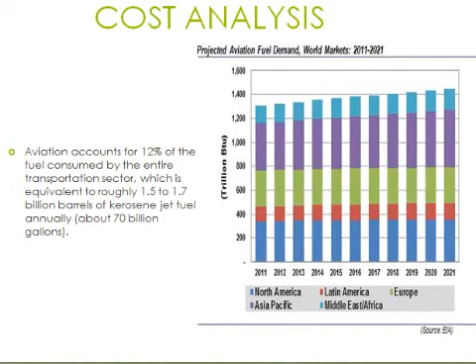Sources of finance for the industry: low interest, municipal bonds, self-amortizing loans, government and federal grants, issuing shares, and lastly, private investors. Cost analysis. As airlines launch the first commercial biofuel flights in the United States, the government is working with industry to scale up production of biomass-derived jet fuel to commercial quantities beginning in 2012.

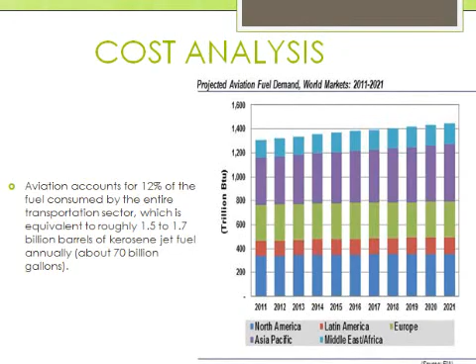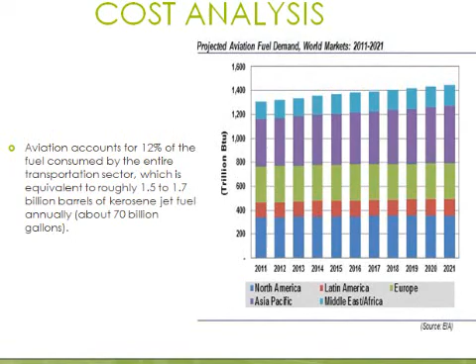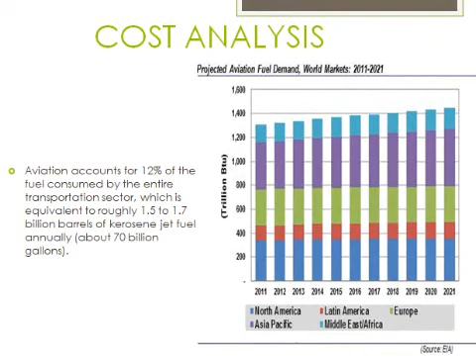Aviation accounts for 12% of the fuel consumed by the entire transportation sector, which is equivalent to roughly 1.5 to 1.7 billion barrels of kerosene jet fuel annually. Analysts project that aviation biofuels will replace roughly 1% of kerosene by 2015, 25% by 2025, and 30% by 2030. This represents a market value of $2 billion, 56 billion US, and 68 billion US in delivered fuel respectively, assuming current kerosene prices.

PEST analysis: political factors, consumption targets, EU targets for biofuel share in transport fuel, fuel tax exemption on biodiesel. Economical factors: price of oil seed, increased price at EU level, higher production, variable costs, price of fossil oil, lower price at world level, thus higher pressure on sale price. Technological factors: the high standards of safety mean biofuel must undergo dozens of experiments on the ground and in the air. This process determines those biofuels suitable for aviation.

Environmental factors include unfavorable climate conditions and rising awareness for reduction in the pollution gas emission. Lower CO2 emissions from biofuel than fossil fuel lead to higher promotion of biofuel. The SWOT analysis. The strengths: it can reduce GHG emission, raise income for farmers, and biofuel production creates new employment.

The threats. Biofuels had a market share of barely 1% in 2005 in the EU. Feedstock production of biofuel is in competition with food production, and it is limited due to land availability for feedstock production. The opportunities. Biofuels have the opportunity to decrease dependency on crude oil, replace a large percentage of fossil fuel, and new and more efficient conventional technologies will be found and existing technology will be improved. The weaknesses. It raises the need of new technologies. Feedstock production for biofuel is land consuming.

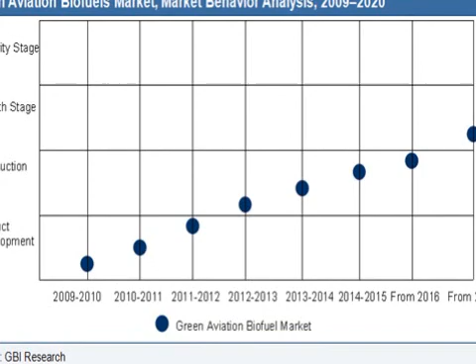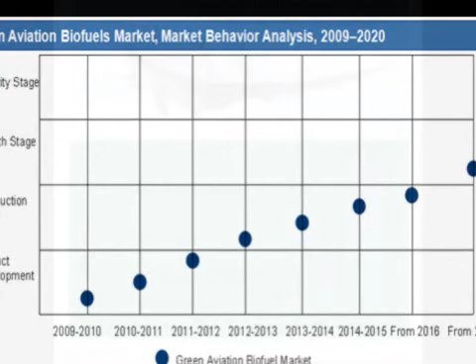It has been predicted that the green aviation market will reach $412 billion in 2020 from $94 million in 2009. Currently, the aviation industry contributes 2 to 3% of the global CO2 emissions. Strict regulations on the aviation industry to reduce the percentage will be an access to the growth of the biofuels and fuel cells market. Biodiesel and conventional diesel estimates €700 per ton. The total amount of 2 million tons of biokerosene costs for aviation is estimated at €1.4 billion.

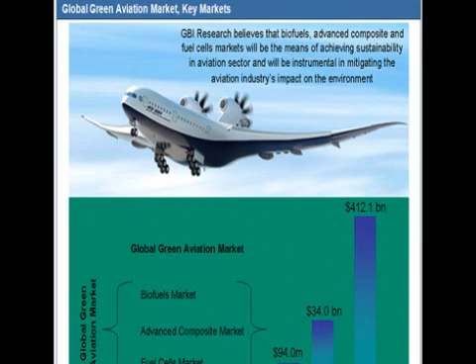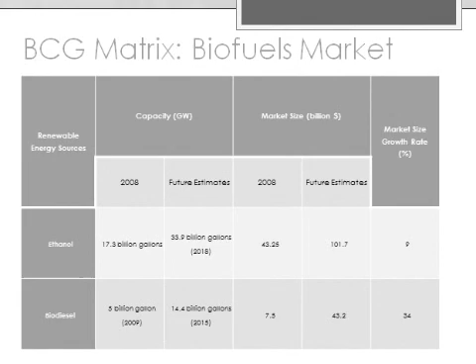Figure 1 is the predicted product life cycle for the green aviation biofuels market. From 2020, the market is predicted to be at the growth stage as biofuels are provided to the mass market, which would increase sales and profits for the producers. According to the BCG matrix, the aviation industry will benefit from biodiesel with a market size of $7.5 billion and a market size growth rate of 34%. Ethanol has a market size of $43.25 billion and a market size growth rate of 9%. These are figures from 2008. The advanced BCG matrix shows that the biofuels market is a specialized one because of the aviation industry players.

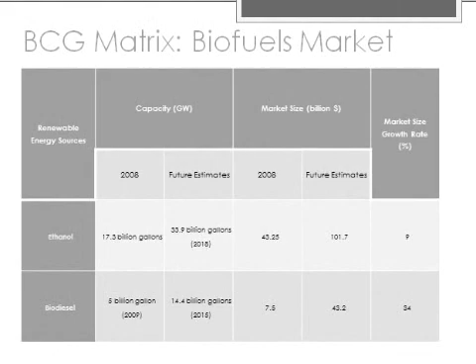The market summary consists of the market structure, market trends, and gap analysis. The first one is market structure. The biofuels market is distinguished as a natural monopoly. There is currently no direct competition. When established, it will own over 25% of the market share. There are high barriers of entry. One main barrier is financial investment.

Market trends. Currently, the largest biofuel markets are in Brazil, USA, China, India, and Europe. Government policies now demand large gas and oil refiners to combine biofuels into their infrastructure. Algae producers who produce biodiesel and ethanol have advanced to pilot and demonstration scale projects, as seen by the test flights fueled by blends of biofuels and fossil fuels.

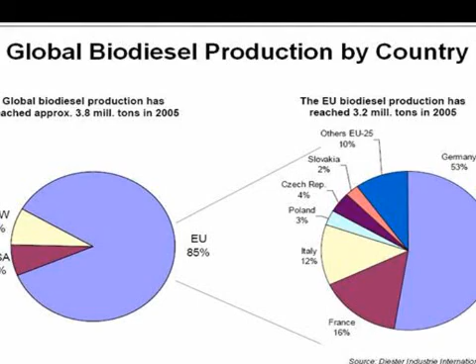Gap analysis research. Gap analysis research for biofuels in aviation identifies the current market position, market objectives, and also the methods of achieving objectives. One example is that issues linked to biofuel markets will affect countries all over the globe. Example, land usage...